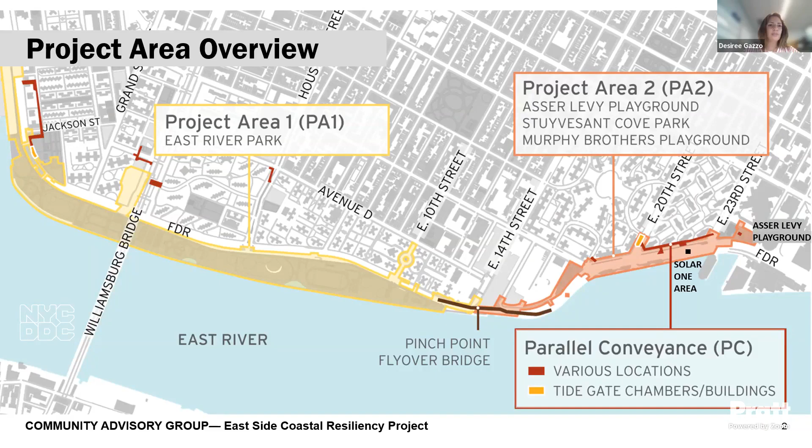So today we have several updates. As everyone is aware, for the project area overview, there are three contracts within the ESCR project: Project Area 1, Project Area 2, and Parallel Conveyance, which we will discuss tonight. The focus area topics for today's meeting are construction progress and approach, environment, hiring, compliance, community programming and coordination, and then we'll have questions.

We're going to start this evening's meeting with the quarterly hiring update and hiring events. Stephen from Bowie Studios is on the line. Stephen, if you'd like to take over and provide the update for hiring. Sure, and you guys are able to hear me loud and clear? Yes. Awesome, well, good evening everyone.

To go over the updates, I just wanted to point out that this is reflective of data as of May 31st of this year. The last time we reported was in April, I believe. And so on a quarterly basis, we will update that information accordingly.

Since the last update, we are now looking at 193 total staff on the PMCM team. This is the team who's overseeing the project. As far as the breakdown is concerned, on the PA1 and PA2 side, it's a total of 68 new hires that we have seen since the beginning of the project. 9 of the new hires are working both on PA1 and PA2, so we ensure that those numbers are not double counted. That's why we pointed it out here.

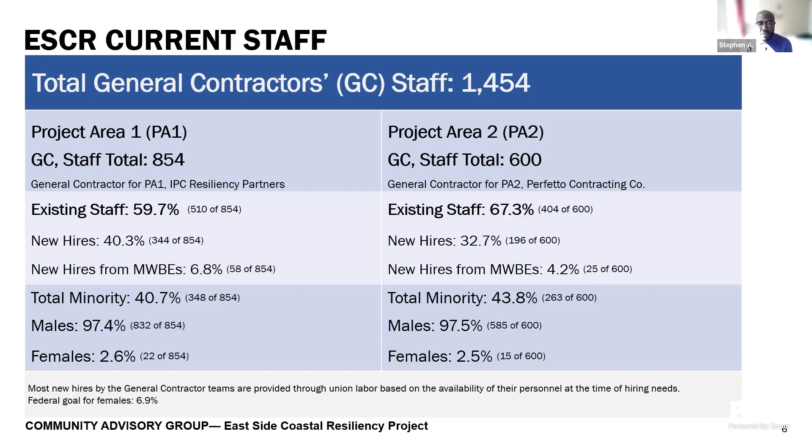With regards to the MWBE goal and the projection towards meeting those goals, right now we are looking to meet both on the PA1 and PA2 side. For the PMCM team, we're looking to meet the goal. As far as the PA1 and PA2 MWBE goals, we're looking to exceed those goals as you see here. Section 3 hires: currently we are counting 5 new hires total for the PMCM team, 8 new hires on PA1 and 1 new hire on PA2 as far as Section 3 hires are concerned.

This is a breakdown that was new in the last presentation. What we did here is break out the staff residency, showing the distinction between new hires and union hires. As far as where folks are coming from, when we look at the total numbers, you'll see most of the existing team is coming from the Long Island and New Jersey side, with a total of over 1,000 existing team members working on the project.

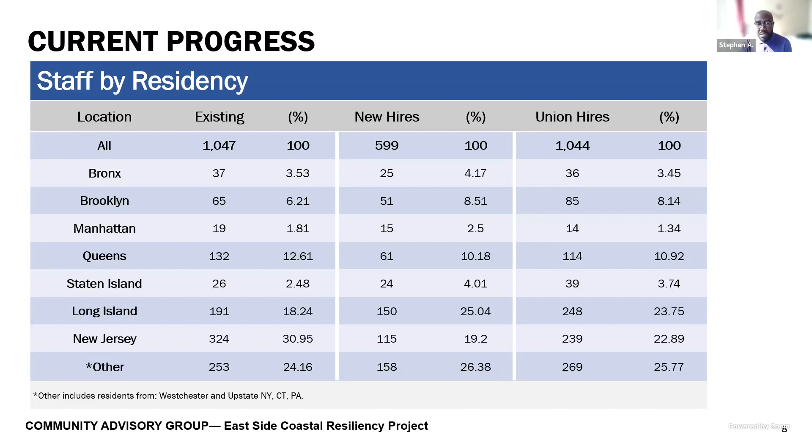With regards to new hires, we are currently counting 599 total, and you can see the breakdown accordingly as to where they're coming from, and also for union hires as well. This will give you a better sense of where folks are coming from, and it also helps us to do more targeted outreach, which we've increased in the Manhattan area according to the project.

Ongoing efforts, we do continue to reach out to the labor unions to highlight and encourage that they prioritize workers who are in the Lower East Side area, and we are currently also receiving support from DDC and other agencies to ensure that message is clear to everyone who supports the project.

We also continue to have our quarterly information sessions and outreach sessions, and we've been increasing our tabling efforts in the Lower East Side area, currently partnered with Workforce One for two of those events. We're trying to bolster hiring practices and outreach in that area by being more present, and we continue outreach via emails and updating the information on the website.

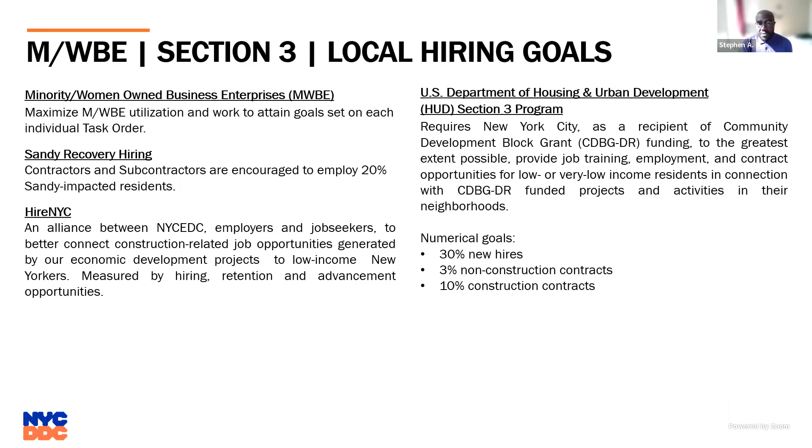I wanted to highlight a recent event. This was a DDC event, supported by multiple CBOs and even unions around the city: the Brooklyn Construction Career and Training Resource Fair. Over 700 seekers responded to the outreach and registered, and the actual event did not disappoint.

In the beginning, there was somewhat of a conversation and networking piece where employers and representatives from unions got to inquire and ask questions and have a discussion about how we can improve systems in the local area to connect seekers to jobs and training opportunities.

Once we were able to receive the flow of seekers who signed up, it again did not disappoint. We had many conversations and received many resumes that came through that day, representative of mostly folks in the construction industry, which was pleasing.

It was a great event, and we saw many folks from the Lower East Side, the local area as well, who stopped by our table and inquired about jobs and opportunities. So more to come on any events in the future, but it was a great opportunity. Workforce One was there, our contractor representative and the PMCM team were there, as well as other employers and training programs.

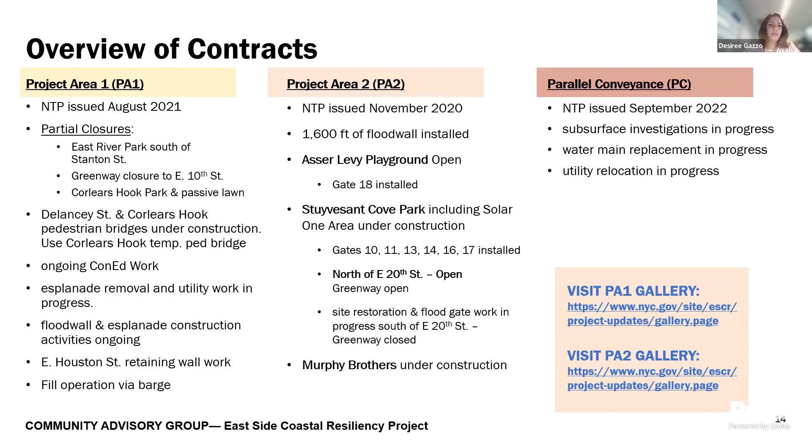For the overview of contracts, much of the information here has not changed. We will provide an update on the fill operations today, so that's a new item on this page. There have also been more gates installed for project area 2, another update we'll talk about later. For 2023 construction activities, pretty much similar work is happening in area 1, the closed portion of the park.

We have the esplanade removal activities along the waterfront, and they're actually starting to reconstruct that, and we'll show you some photos in just a bit.

The deep sewer activities are kind of completing, and then the park drainage work is starting again. So the park drainage is the next step in the utility work that's going to happen.

For the flood wall and combi wall, pre-drilling and installation is ongoing, and again we have some photos of that. The fill material deliveries by barge will continue through the summer.

At Delancey Street, they'll be working on the curb and sidewalk construction while the utility work is kind of on a pause. The construction for the new Corlears Hook Bridge is moving forward.

And then we have some upcoming utility work that's ongoing, and the flood wall activities at Montgomery and Cherry will pick up this year as well. In the open section of the park, work will continue at East Houston Street.

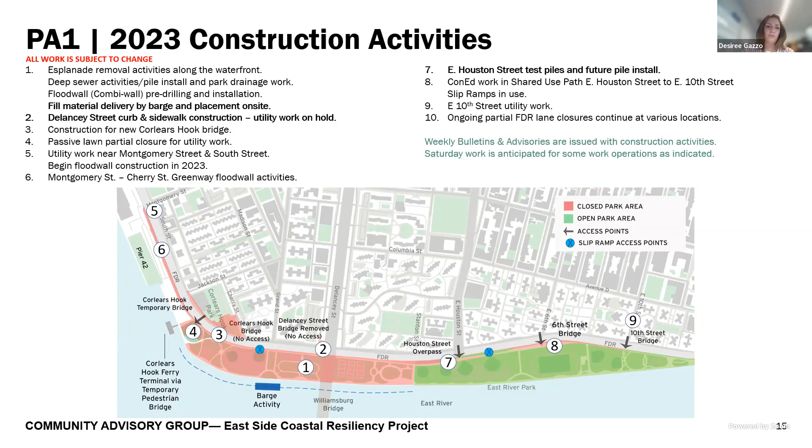So for Delancey Street, tomorrow we'll be issuing an advisory on an extension of the sidewalk closure at Delancey Street. For the next bit, there will be a closure from the FDR up to Baruch Drive. So the construction activities will extend that closure.

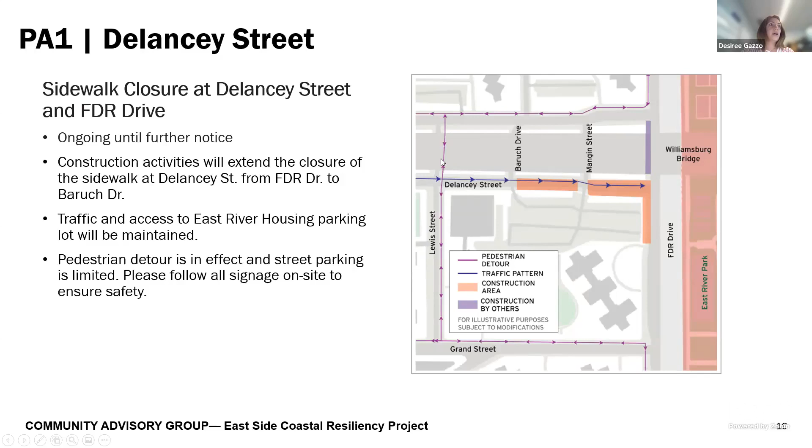The traffic and access into East River Housing parking lot will be maintained. However, the pedestrian detour is in effect. Originally, there were some signage that allowed folks to cross those side streets there. So the signage has been removed so that the full pedestrian detour to Lewis Street is now in effect again.

So installing the new combi wall and cap wall is progressing. And then again, the fill work, we have an update for that in just a bit. So we are moving forward.

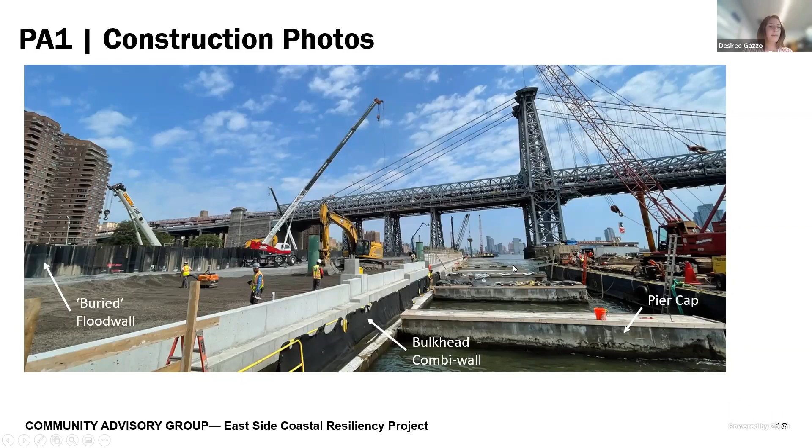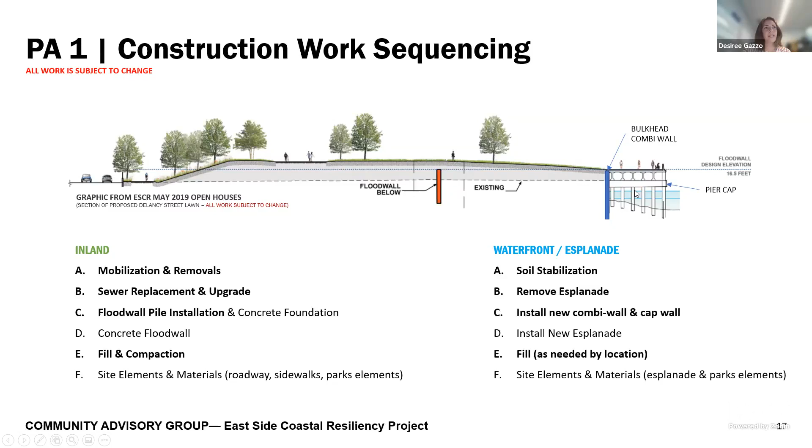So I'm just going to go back so you can see again the progress that we are making. I know it's hard to tell when you're looking from far away, but I got to go on site on Thursday and walk and really look at what's happening, and it was really amazing. I'm always looking at this section, and then to be on site and actually see all the pieces being built was pretty spectacular. So again, this is the pier cap where it is now, and then the esplanade will be built on top of those pier caps, and then that's the bulkhead combi wall.

This is a couple of construction photos of the combi wall and cap wall. This is just the construction process of the combi wall. So you have the tube piles here, and then the sheet piles that connect the tube piles.

And it's pretty amazing because the tube piles have just this little slot on the edge that the sheet piles slide right into, so they connect, which I think is amazing for these pieces that are so large that they just seamlessly fit into one another. So that happened, they interlocked with each other to form this combi wall.

And then the tube piles are filled with concrete and rebar structural supports. And then the contractor builds these huge rebar box cages on site with all these rebar pieces. So they construct them and then place them over the piles, and that's the structural formwork for the cap wall.

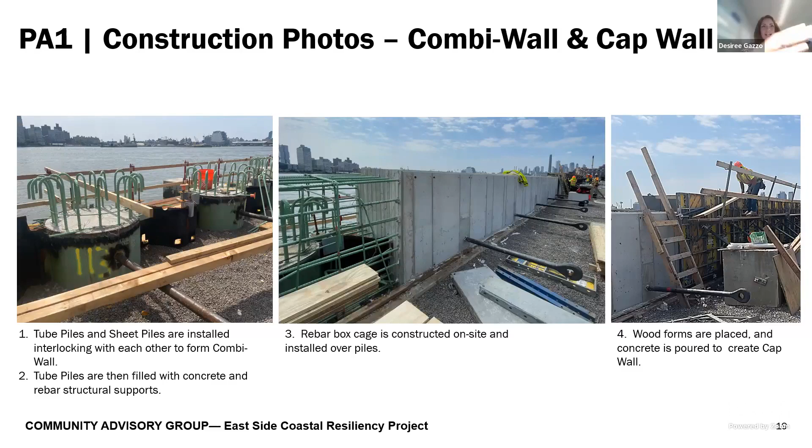So then they place the forms, very similar to how they have been constructing the flood wall with the wood forms that are placed, and then the concrete is poured to get that cap wall. And then these are the tiebacks, which we can talk about in another meeting, we'll talk about how that works. But it was just really great to be able to see how they're working down the esplanade, constructing that new bulkhead.

So for the fill operations, again, the CAG submitted several questions on the fill operations. We did send that back over today. Completely understandable if not everyone had a chance to read it, but the responses are there. I think there was just one that we have to come back to you on. Most of the responses we presented at the last CB3 presentation. So I have the link here - the responses to the letter will be posted on the inquiries page tomorrow.

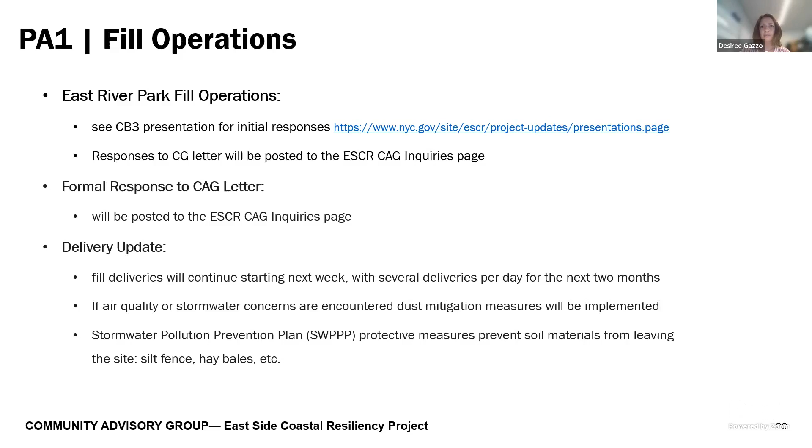And then for the fill delivery update, they will continue starting next week again with several deliveries per day for the next 2 months. As per the letter that we sent back, if air quality or stormwater concerns are encountered, dust mitigations will be implemented. The contractor follows the SWPPP protective measures, which we've talked about in the past, to prevent soil materials from leaving the site by using silt fence, hay bales, tarps, etc., as necessary. Again, there are many more responses in that letter, and between this meeting and the next meeting, if there are any follow-up questions, we can certainly discuss them.

So another item we wanted to talk about today was upcoming phase 2 Esplanade acceleration work. We briefly mentioned it in the updated phasing slides that were presented, I think, a couple of months ago now.

So for the ESCR status, again, the program is on schedule to finish by the end of 2026, and the team continues to evaluate the schedule and available work areas to ensure completion while maintaining the 42% open space access. And then as prioritization and acceleration opportunities arise, which we spoke about when we spoke about the updated phasing, and we'll talk about more in the next slide, the ESCR team does weigh the options in conjunction with potential impacts to park users, and then looks for solutions to mitigate impacts.

So examples of past work prioritization and acceleration opportunities have been in phase 1 when the contractor switched to working north to south as a prioritization means, to complete the deep sewer utility work first so that the fill operations could begin due to the period of settlement being unknown. An acceleration work item that the contractor moved forward with was the phase 2 ball field, when they did the stone column installation and the sewer bypass. Again, so that was something that we temporarily moved into the phase 2 portion to complete something that would ultimately move the project forward, and help with maintaining that schedule.

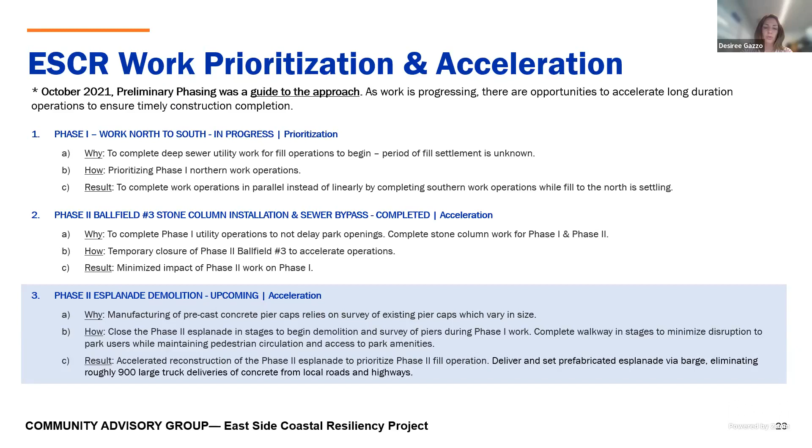So basically, these are the uneven pier caps that are existing now, which were unknown to be all different sizes until the esplanade was removed.

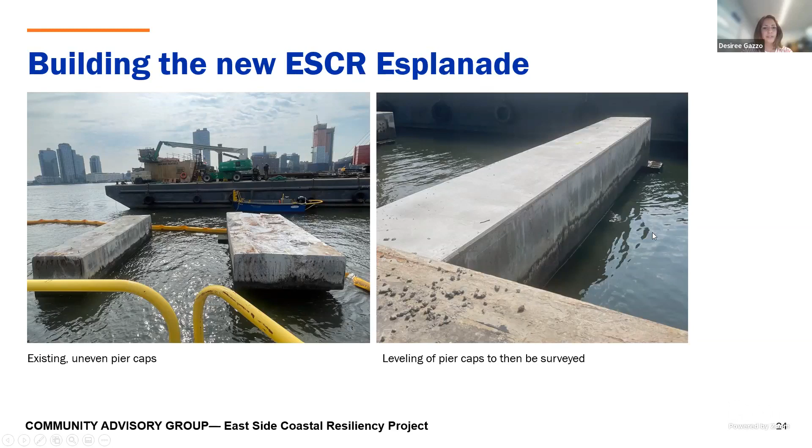So the contractor has been, as they remove the esplanade, they have to go in and level all the pier caps to be surveyed. And then once the pier caps are leveled, they have to survey each pier cap so that they can fabricate these esplanade support beams that sit on top of the pier caps, which then the esplanade decking goes on top of. So by prefabricating the pieces, they get to manufacture them off-site and then bring them in by barge and then set them on top of the piers.

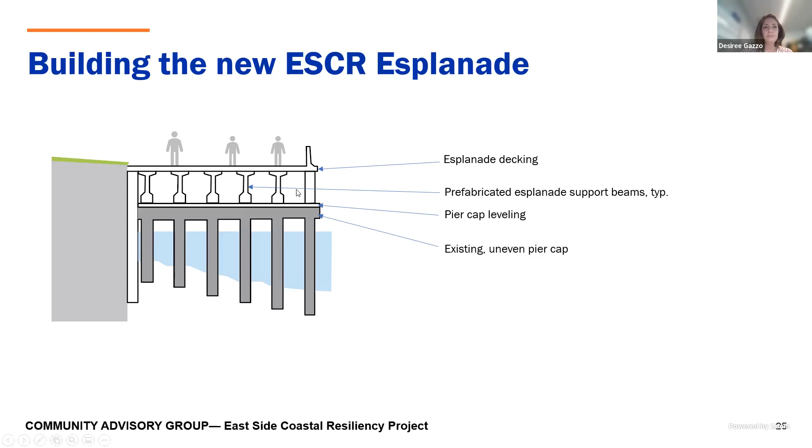So again, it reduces local traffic of having to bring in concrete trucks to fabricate them on site. So it is a tedious process, and we are looking to get ahead of that.

And the proposed plan, and this is subject to change, would be to work in phases starting towards the end of this year to temporarily close a portion of the esplanade and then construct a pedestrian access path along the existing recreation field fences. And then, keep the esplanade closed, but reopen the access path to maintain that circulation around the open areas of East River Park, allowing the contractor to start with the demolition of the esplanade, the leveling of all the piers, and then the surveying of all the piers so that they could make the drawings for those support beams.

So this is the proposed plan as of right now. It is in the early stages. Again, this isn't happening until the end of the year. So we wanted to introduce this at this meeting since we don't have CB meetings for this month and next, and we won't meet with Community Board 3 again until September. And then we'll either meet again next month for CAG or give a written update. But we wanted to introduce this early, receive feedback and questions, so that come October, and come next month in September, we can discuss in more detail.

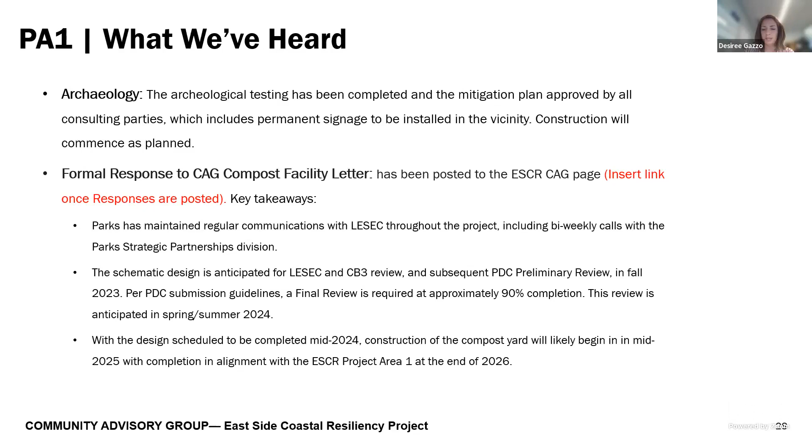Again, if you could read the full letter, and if there are any follow-up questions, we could certainly take those between this meeting and the next one.

There were a few questions on tree and shrub maintenance. The contractor is responsible for tree and plant maintenance, including watering and other items. The guarantee period is about 18 months for plants and 24 months for trees. Before the guarantee period is over, Parks will assess tree and plant health with the contractor, and replacements will be made as necessary. For tree sizes, the majority of trees planted will be in the range of 2.5 to 3 inch caliper, varying in height depending on the tree, about 12 to 18 feet tall. The trees include a high proportion of fast to medium growing trees, such as honey locust, dawn redwood, coffee tree, and others, expected to grow between 13 to 24 inches per year.

I also have a link to the 2020 design presentation, which has more information on the tree plantings. I know the locations were provided. I did go over to the park, I think it was off of Sixth Street, 10th Street, this morning, and take a look at the trees that were planted there. They did look around 3-inch caliper. I took a quick measurement, but you have to use a special caliper measure to measure trees, so I'm going to circle back with Parks to try and find out exactly what the caliper of those trees were. But Parks typically plants around 3-inch caliper trees as their street trees, so I'd imagine these are similar.

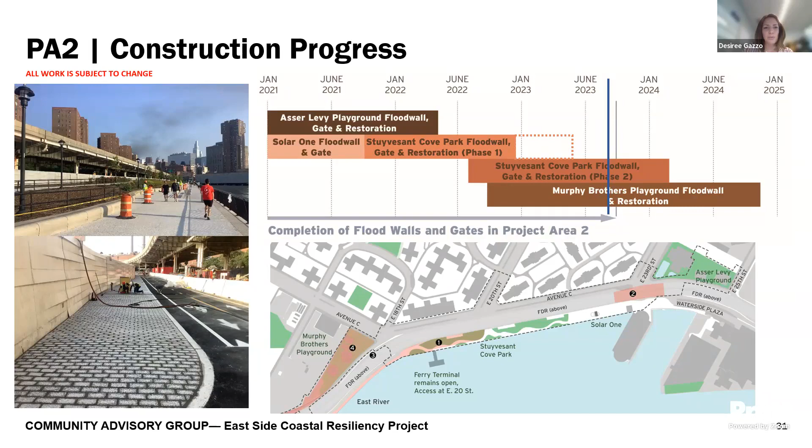Oh, okay, great. All right, so for PA2 construction progress, we're moving right along. Most of the work north of East 20th Street has been completed. We left a little pink area here at East 23rd Street, just due to the fact that there's one more gate that needs to be installed up there and a little finish work, but basically that intersection is open and working really well again. I'm sure all the residents there are very happy about that. Much of the work is down below East 20th Street. Here you'll see these little pins with black numbers are all of the gates that have been installed. There are 3 more gates north of Murphy Brothers that should get installed this year, so soon we'll have all of them installed north of Murphy Brothers playground. It's really exciting that so much of this project is under completion.

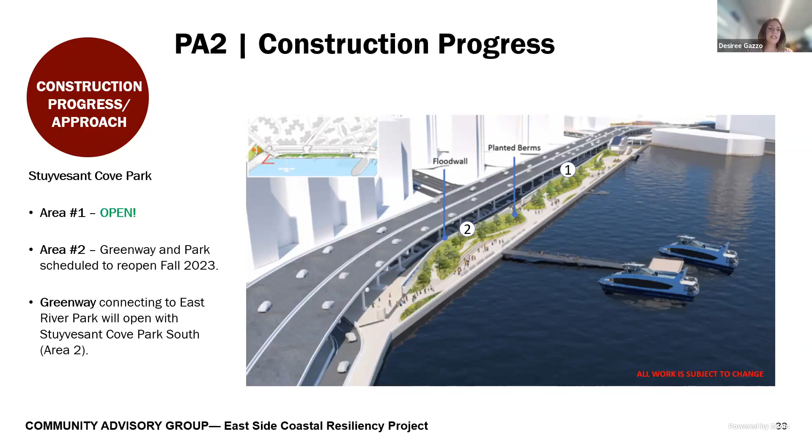Again, the Stuyvesant Cove Park Area 1 is open. Area 2 is scheduled to reopen this early fall, with the Greenway connecting to East River Park also hopefully opening early this fall.

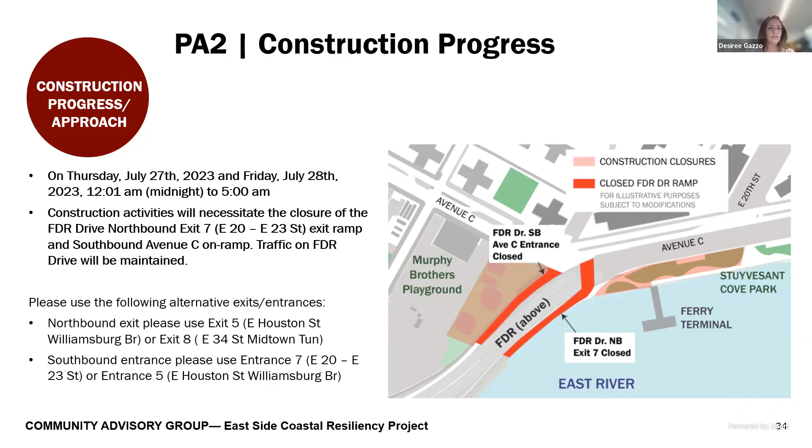On Thursday, July 27th, there is some overnight work which will necessitate the closure of the FDR northbound exit 7 exit ramp and southbound Avenue C on ramp. Traffic on the FDR drive will be maintained, but we wanted to make everyone aware of this. The alternative exits and entrances are posted here, and they're also posted on the advisory.

For the environmental reporting update, we wanted to note that the air quality on June 6th through 10th and 28th through 30th was impacted by smoke drifts from the Canadian wildfires. We don't have the same environmental team handling PA1 and PA2 — they're different consultants, so they chose to handle that a little differently. You'll see that in the upcoming reports. Also, just a note clarifying what non-construction activities mean: non-construction activities indicate weekends or overnights when the contractor was not working.

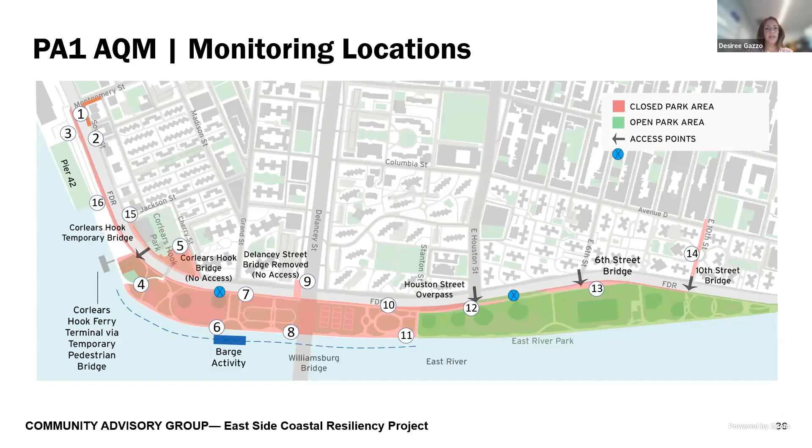So the PA1 AQM monitoring locations have not changed since the last presentation, as well as the PA2 AQM monitoring locations. For PA1, there has been a significant improvement as of last month.

In much of the northern portion of the area, there were very minor incidences. And then up in Montgomery Street to Jackson Street, where we have that combination of Project Area 1 and Pier 42 construction vehicles entering and exiting the site, there were again a few more exceedances, but I think we ended up being much better than last month, and the contractor is actively working on wetting that construction entrance area down and monitoring who the traffic in and out is.

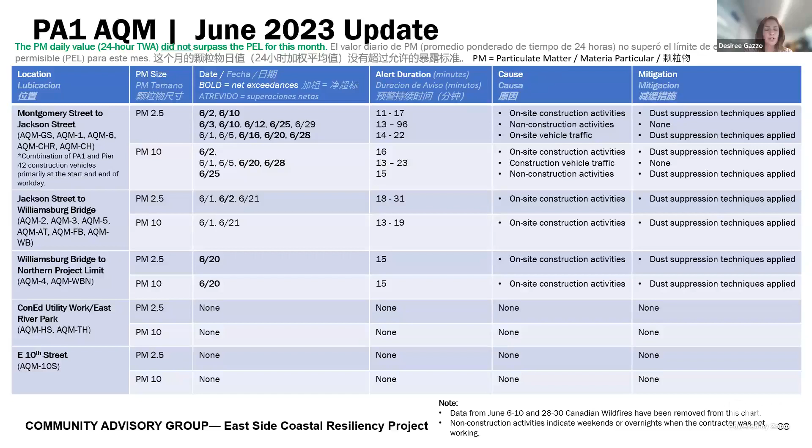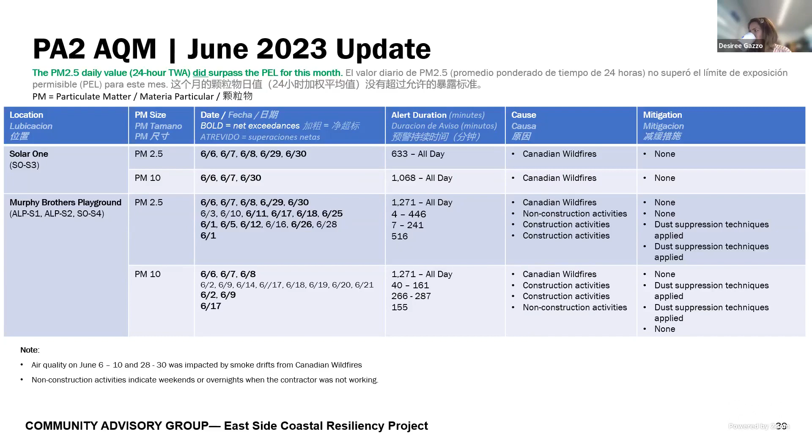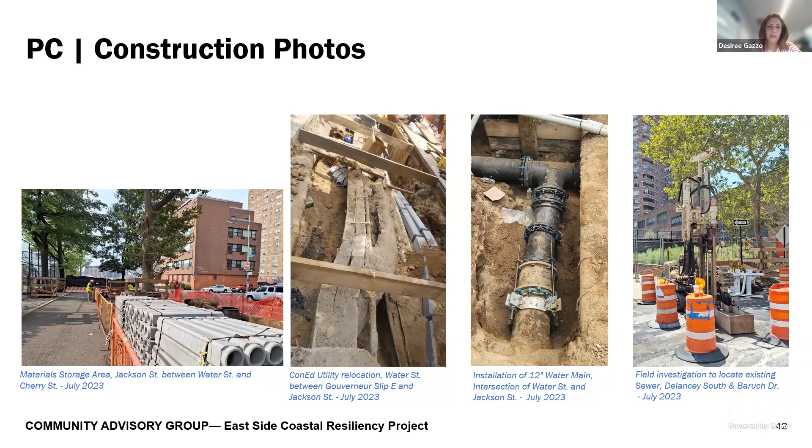And those are the slides that we have, or the updates that we have for you this evening. So I'm happy to take questions.

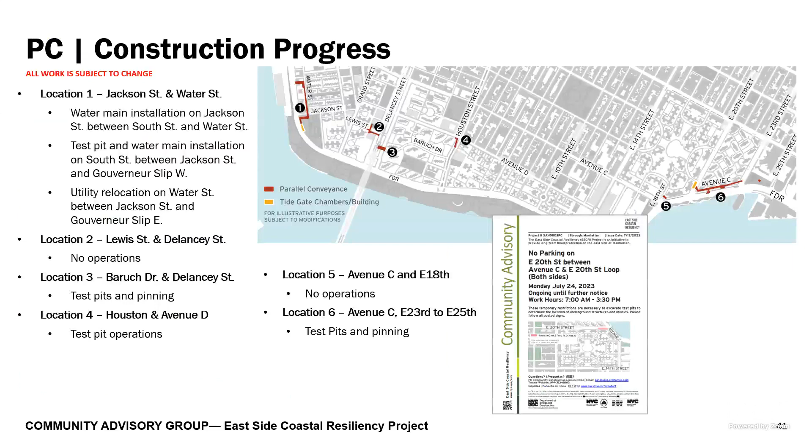It's going to be like scuttling through a little rat maze. I don't know if that's the feeling you want people to get for this period of time, but it just seems very poorly planned. If you're saying the park is open, that's hardly open. I encourage that temporary esplanade to be wider.

I want to point out - you say it's going to go all the way around, but right now on 6th Street, 2 days ago I counted 41 vehicles parked there that belong to people working on site. Will all those cars be moved elsewhere? I also could see there are lots of cars south of Stanton - are you moving the privately owned vehicles off the Greenway entirely for this period?

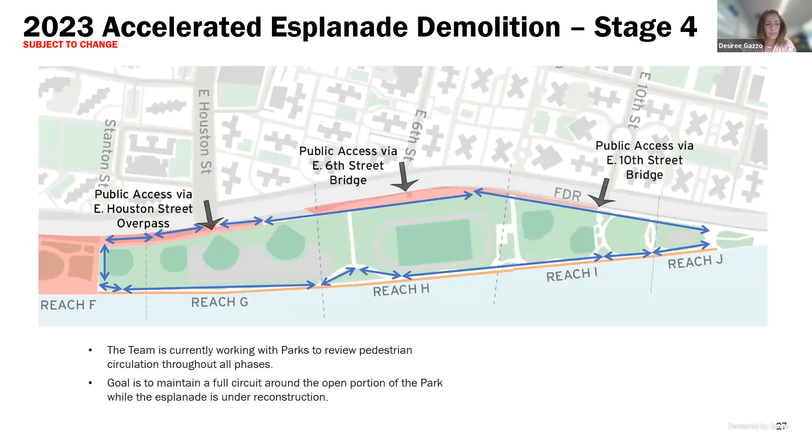So I'm assuming this is happening in phases, so the Esplanade is not completely closed. At the end of it, at stage 4, which was February of next year, by that point the full Esplanade would be closed, but it would close in stages.

So from October through January, parts of the Esplanade would be open. Correct, and then it closes in February entirely. Well, January to February is when Reach G closes. Starting approximately in January, depending on when they start work, Reach G would close to build the pedestrian access path. Then the access path would open, but the Esplanade would be closed for demolition. Okay, thank you.

But it doesn't all close at once. It closes in stages. Thanks.

Oh, and then, sorry Trevor, just to the point of documentation, DDC has a photographer that has been photographing the site throughout the progress for both Project Area 1, Project Area 2, and I believe PC. But we have a mixture of photos on the website as well. Beyond that, we'd have to find out from DDC if anything else is planned.